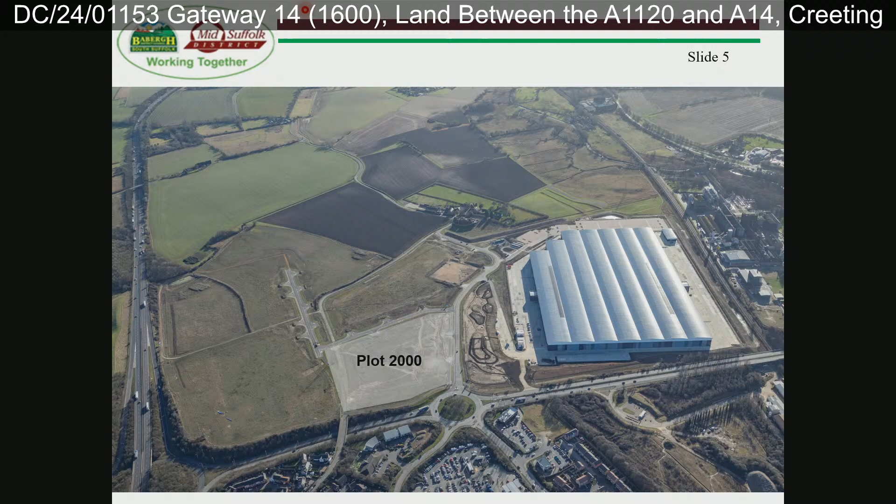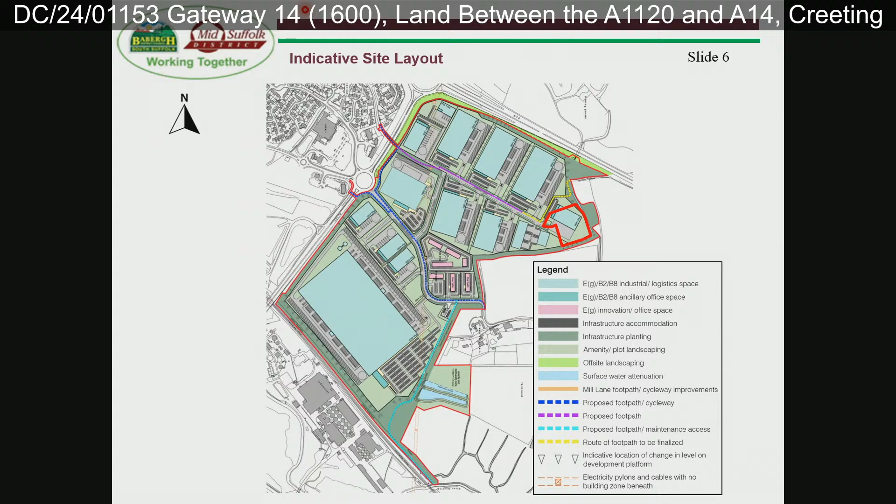This is the indicative site layout that was submitted at outline stage, and I've highlighted in red the plot that we've got the reserved matters for today. Moving on to site and constraints. This is the application site. It's in the easternmost parcel of land on the development, forming part of plot 1600. It measures approximately 1.54 hectares. You can see on that plan plot 4000, as that's now been built.

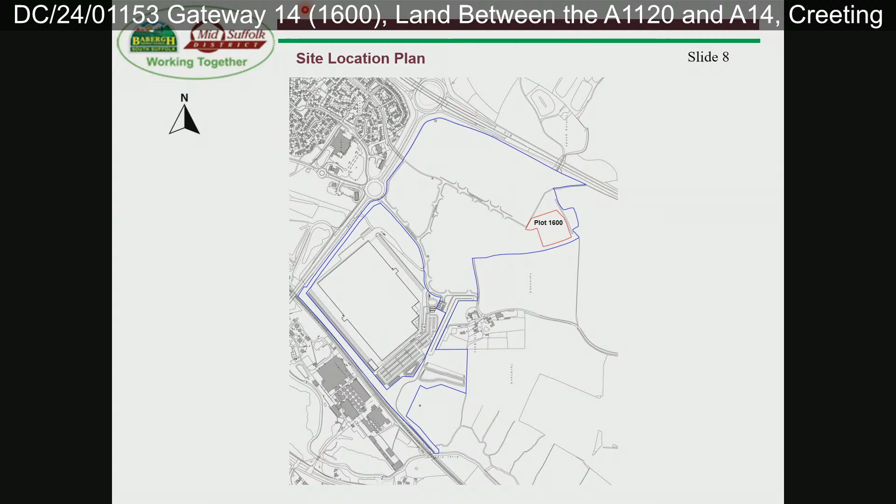And just for some context, we've got the A14 to the north, Cedars Park, Tesco's, Creeting St Peter, Clamp Farm Barns, and then the A1120.

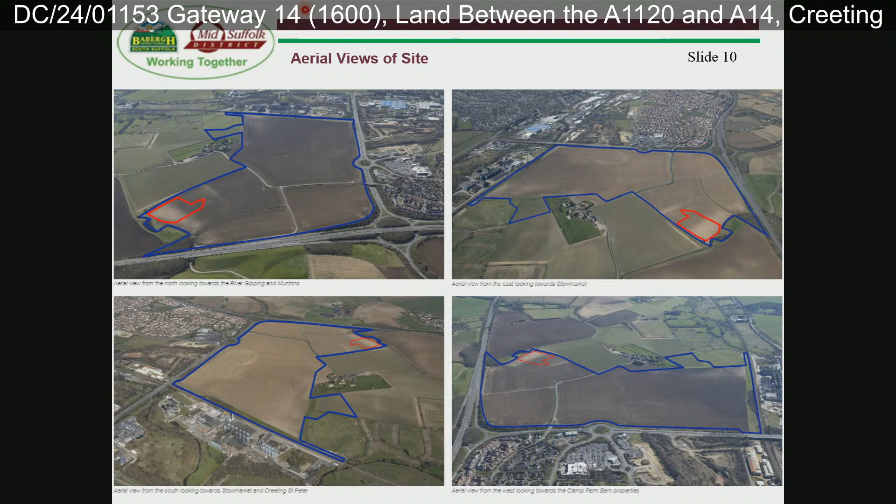And these are some aerials submitted with the application. Obviously they're not the most up-to-date as they don't show plot 4000 on there, but it gives some more context to the location. And then in terms of the constraints map, there aren't any constraints affecting the site.

Obviously it is outside the settlement boundary, but does have outline planning permission.

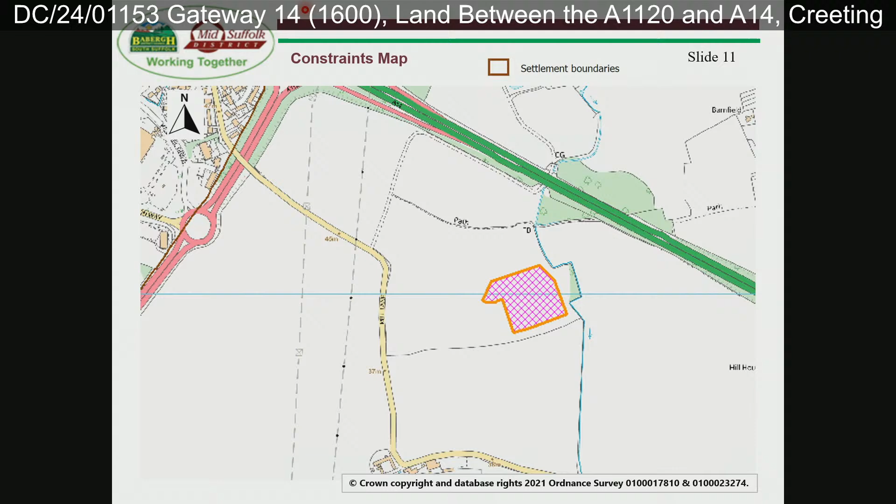And just wanted to briefly touch on the tenant, and I'm sure the agent is here today, they can give some more detail, but the plot and unit has been designed to meet the needs of Bauder, who are a manufacturing company that manufacture building construction materials, including green and blue roofs. They currently operate a facility in Ipswich, and it's my understanding that Bauder are repurposing and refurbishing their existing building in Ipswich, in which their distribution element would be relocated to Gateway 14. This expansion and job creation is envisaged across both locations at approximately 35 jobs.

And just to note that the proposal is for, as I said, B8 storage and distribution.

So moving on to the first reserve matter, layout. I've highlighted here the split between the B8 warehouse in red, the 2-storey office, which is attached to the north in green, and then a hazardous store, which is attached to the south. So the building would total 4,095 square metres, and 24% of the site would comprise soft landscaping.

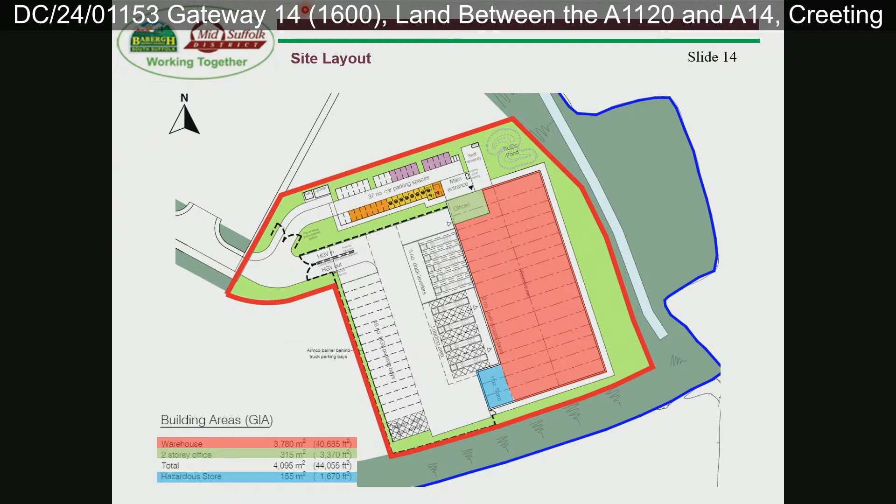And just looking at the comparison between the illustrative master plan submitted to outline and then the updated master plan we've got to the reserve matters, you'll note some changes. So the key ones are the reorientation of the building, the location of the service yard and car park, that this takes a smaller plot size than envisaged, and the loss and redistribution of on-plot landscaping.

So it's understood that these amendments have been driven by the site topography, which slopes downwards on an eastern trajectory in the corner. The revised orientation allows the site to work better with the topography, minimising the amount of ground remodelling required, meaning the building can sit at a lower ground level.

And just a recap of the site connectivity, you've got the Toucan crossing, which is installed and operational on the A1120, the stopping up of Mill Lane, which has occurred, and you've got a new footpath connection to Gipping Valley Way to the south.

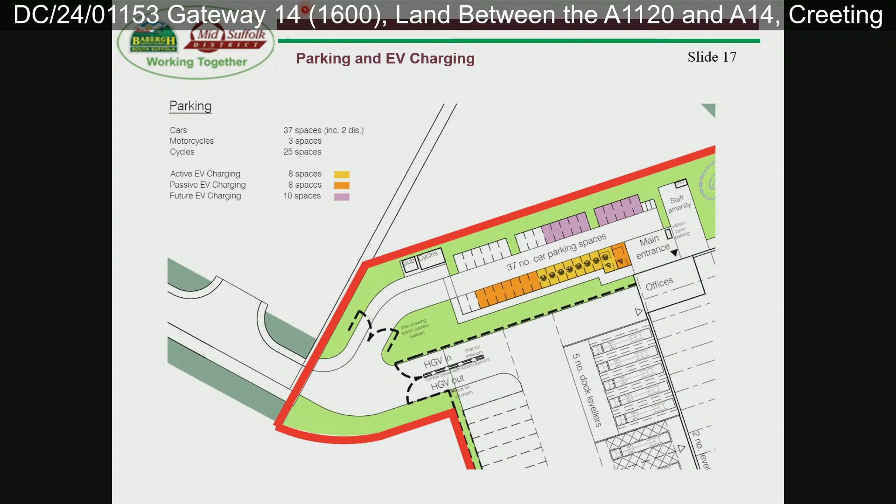And then moving on to parking and EV, so we've got 37 car parking spaces. We've got 8 active electric vehicle charging points, and then a further 18 which are to be provided above the standards with the infrastructure in place for future connectivity. All of the parking, EV and cycle storage is compliant with Suffolk parking guidance.

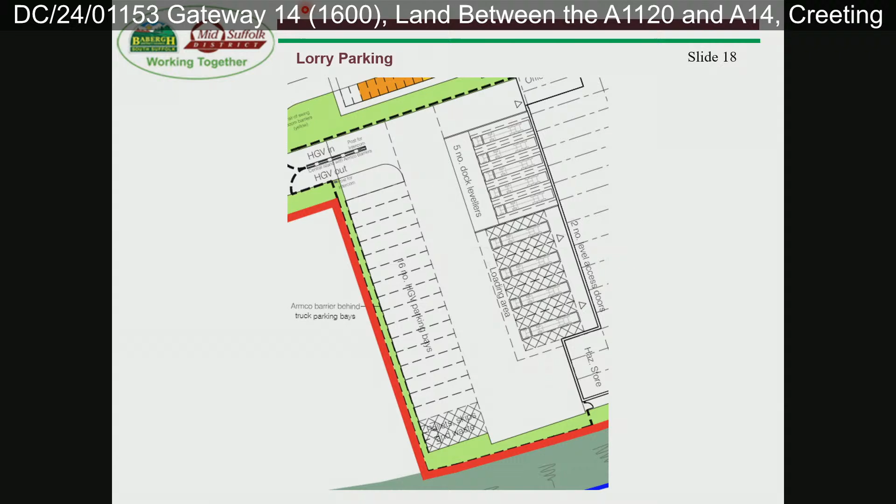And just moving to lorry parking, so you can see on this western boundary you've got 16 lorry parking spaces. As we've seen on other plots, it's possible that this area might also double up to be used for container and external storage. At the moment there isn't a proposal as such for this, but we're recommending a condition for a container and external storage management plan to contain details of the location and storage heights of this storage.

Just moving on to cycle storage, so you can see that the cycle store is located adjacent to the vehicular and pedestrian access.

Also, there is a proposal for shower and locker facilities within the office building, as we've seen on the other plots that have come forward, and specific details related to that are subject to condition. And there is also visitor parking adjacent to the entrance in the form of Sheffield stands.

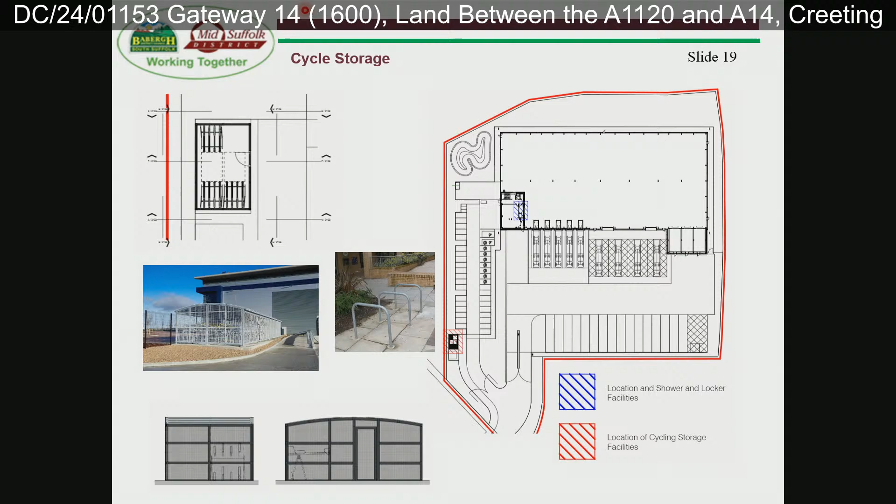Just in terms of access strategy, so you can see there's 2 accesses for this unit. Both come off Gosling Avenue. The northern access would be used for cars and also pedestrians and cycles, and then the southern access would be used for HGVs.

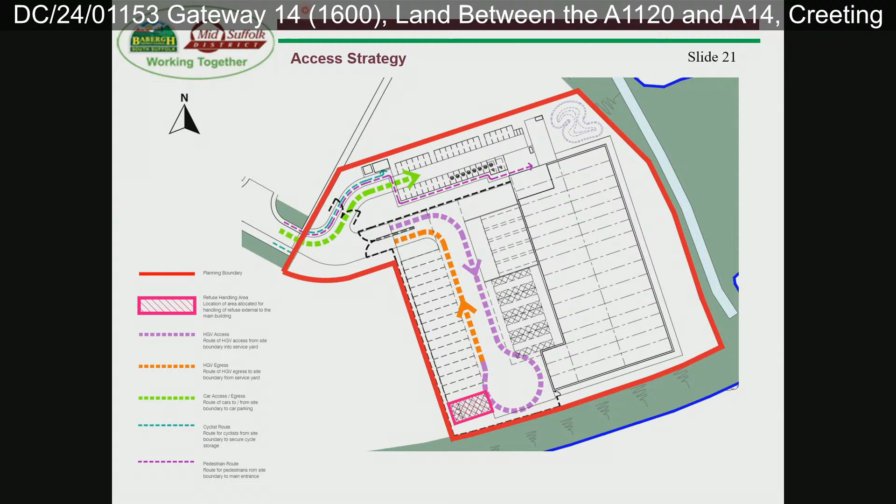And then just sort of for information, a non-material amendment application was submitted and approved to extend Gosling Avenue. You'll see from the photos that the public footpath has originally been installed in this location. I haven't actually mentioned it, but you can see along here, so this boundary, this is the public footpath, and you'll see that better in photos. But so, yeah, we've approved an extension to this roadway to connect the plot to Gosling Avenue.

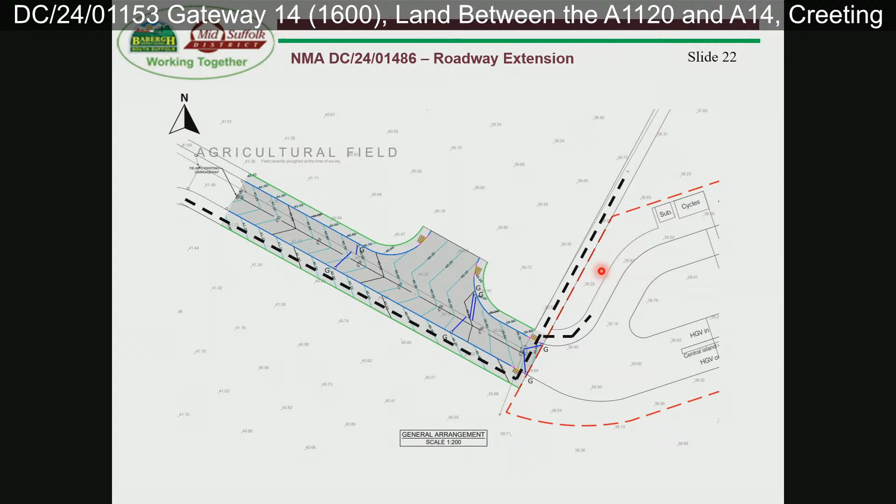The route of the footpath is unobstructed, so I'll just flash it up here. Essentially it will run to the south of this highway, and you can see a dropped curb crossing here, so cyclists and pedestrians can cross to then either take the footpath or enter the site.

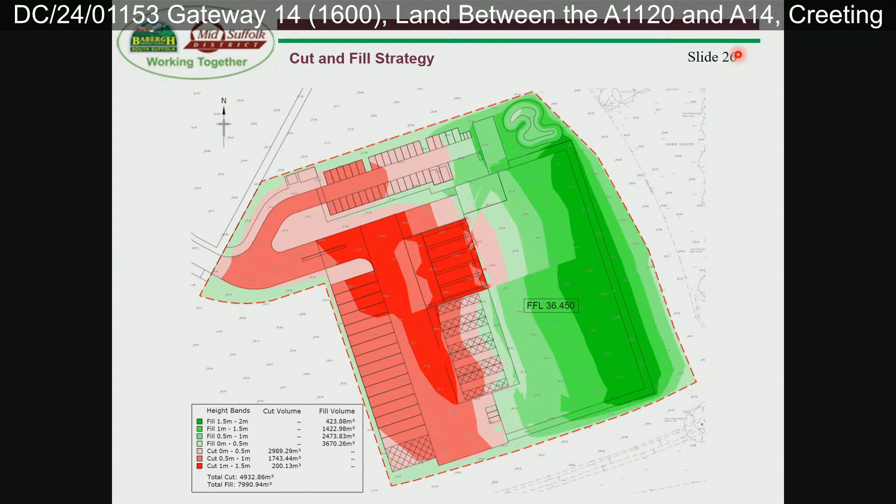And then just the cut and fill strategy that's been submitted with the application. You can see that soil from the west of the site will be used to fill the east of the site to create a level site. And there is an overall requirement for fill, and that will come from the on-site borrow pit. Because you might recall that on 4000 and 2000 there was excess cut, so that's what's being used on this plot.

And then just comparing levels between the outline and the reserved matters. I've just highlighted these by colour. You can see that the finished floor levels is within scope, or if not slightly lower than envisaged. Same with the maximum building height, the eaves height is also a lot lower than envisaged, as well as the maximum building height. And there's just a section at the bottom there. You can see the red dashed line at the top indicates how high the building could have been under the parameters set by the outline consent.

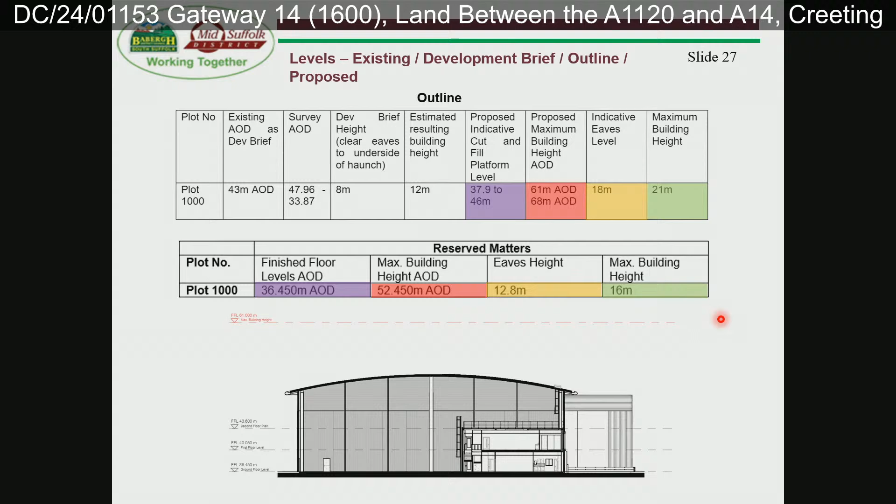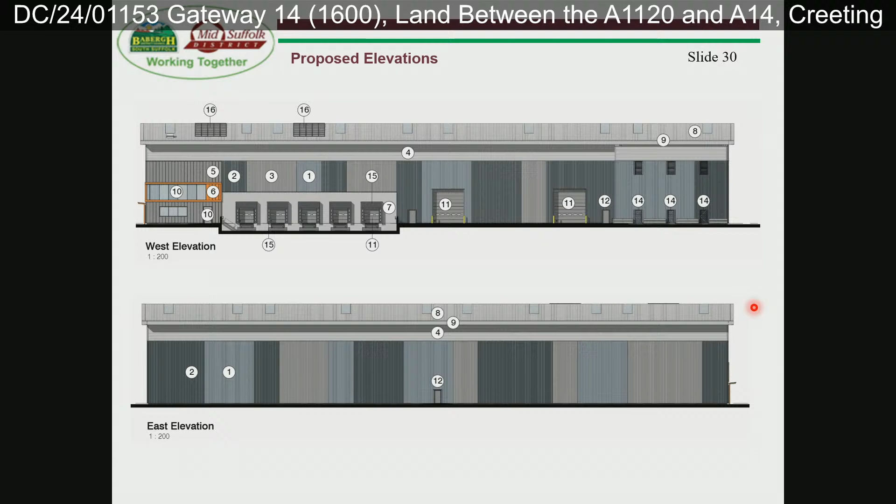And then moving on to appearance. So the proposed building would have a barrel vaulted roof to match the roof form that we've got on plots 2000 and 4000. The proposed materials include metal cladding, concrete panels, and steel and aluminium windows and doors. The cladding would be arranged in vertical bands of differing widths and complementary colours and tones. The proposed colour palette includes a variety of blues and greys to reflect the colours of the horizon, built form and sky.

And then just the entrance detail here. As on 2000 and 4000, we've got the lighter coloured top of the building, which, it's hoped, will reduce the perceived height of the building, and in combination with the vertical cladding, it will blend into the sky. And you can also see here the flat roof, which is the hazardous store.

And just moving on to some of the details. So this is the entrance detail. You can see there's a difference between the two cladding options. So here, sort of 1, 2, and 3, which you can see here, have the same type of cladding that we've approved on previous plots. And then to define the entrance, we've got vertical flat panels.

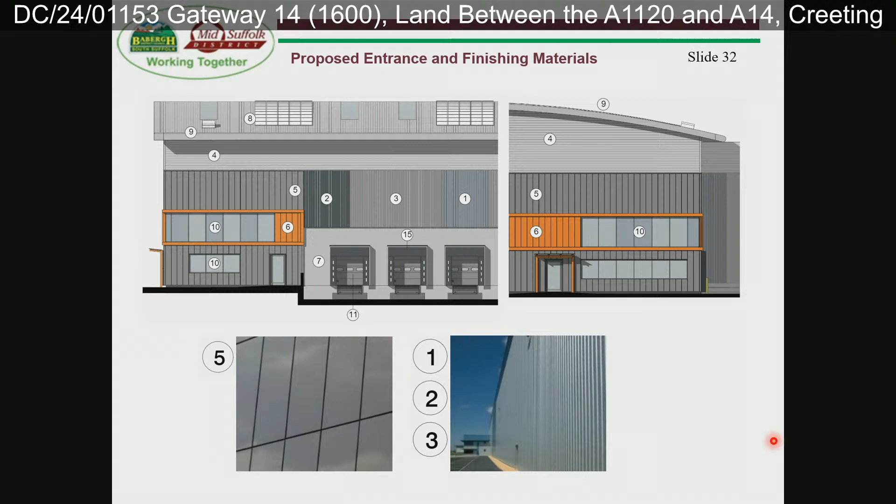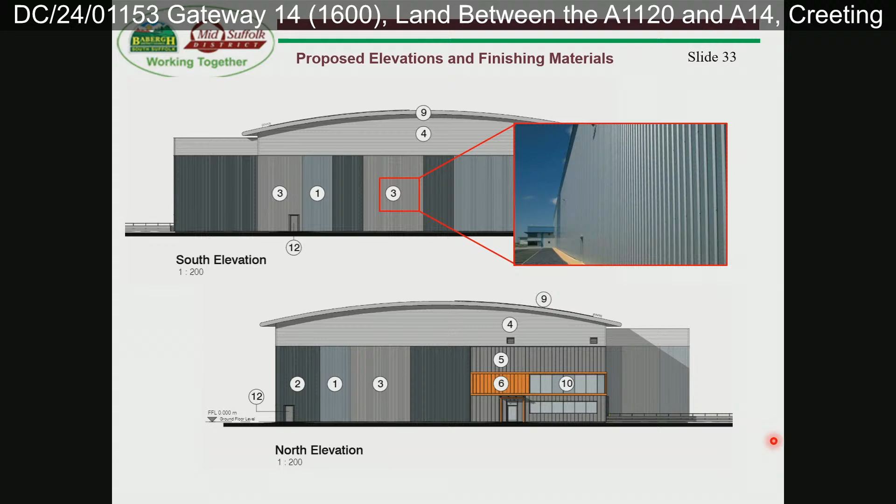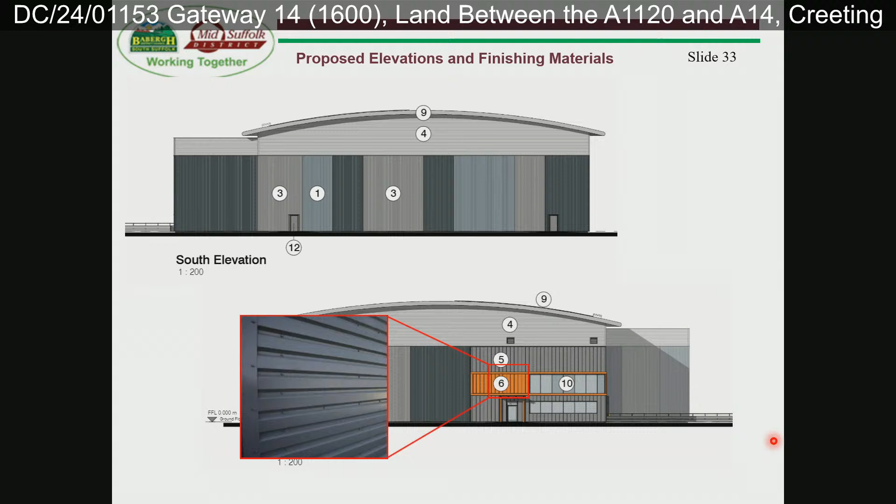And again, you have seen these before, but I just thought it'd be useful. So you've got the vertical trapezoidal cladding here, and then the cladding under the eaves, and then roof cladding. These are all the same as what we've got on 4000 and 2000. You've got the concrete panels around the loading bays and dock levelers.

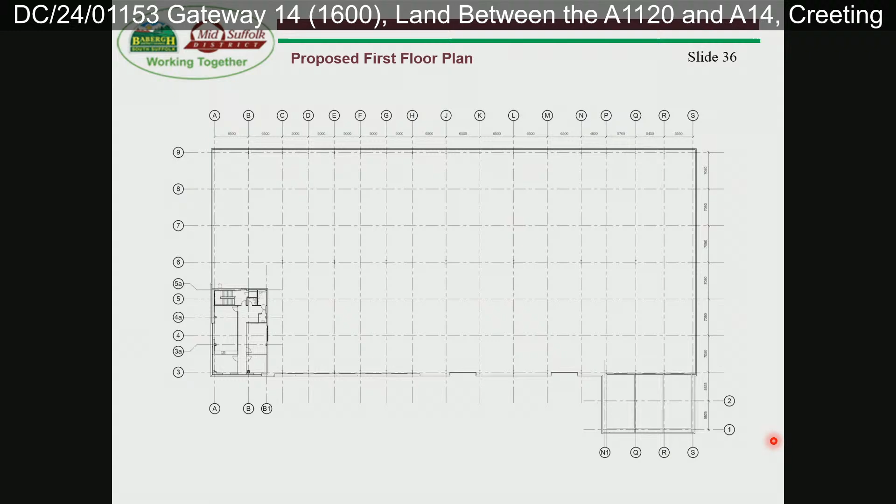And then just moving to the floor plan. So the proposed building has a depth of 45 metres and a length of 95 metres. So you can see here, the hazardous store and the office. And then moving on to the first floor, so the office does span, it's a 2-storey office. And then just in terms of the office detail, as you can see how it might be split up. You can also note here the shower and locker facilities for those that might choose active travel.

And then moving on to the roof plan, so you can see the barrel vaulted roof and some solar PV, and just to note that the whole extent of the roof has been designed to accommodate further PV installation should the infrastructure become available to do so.

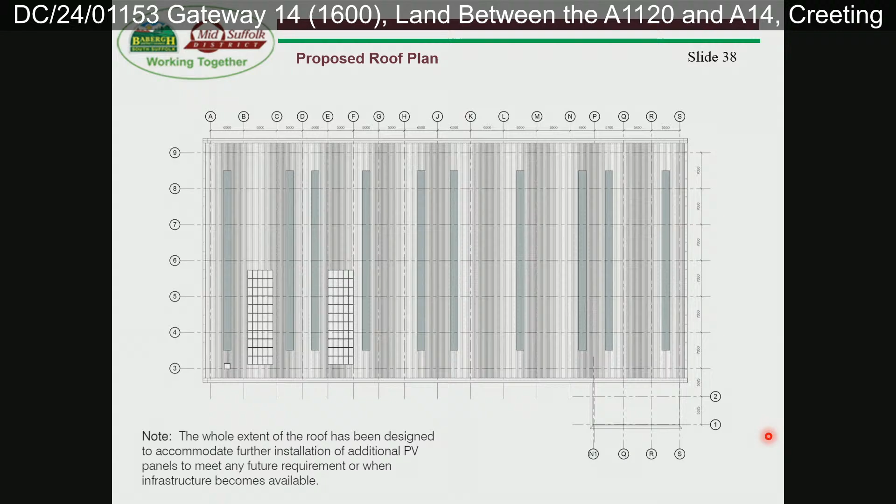And then moving on to colours, so I've included snippets of the RAL colours here just so you can see what they might look like. So the application was accompanied by an environmental colour analysis, and that illustrates that the views are made up of landscape, horizon, built form and sky, with the most significant portion of the visual setting of the building being sky. Just to note that all of the colours have been used on plot 4000 and 2000, with the exception of the orange, which is the tenant's corporate colour.

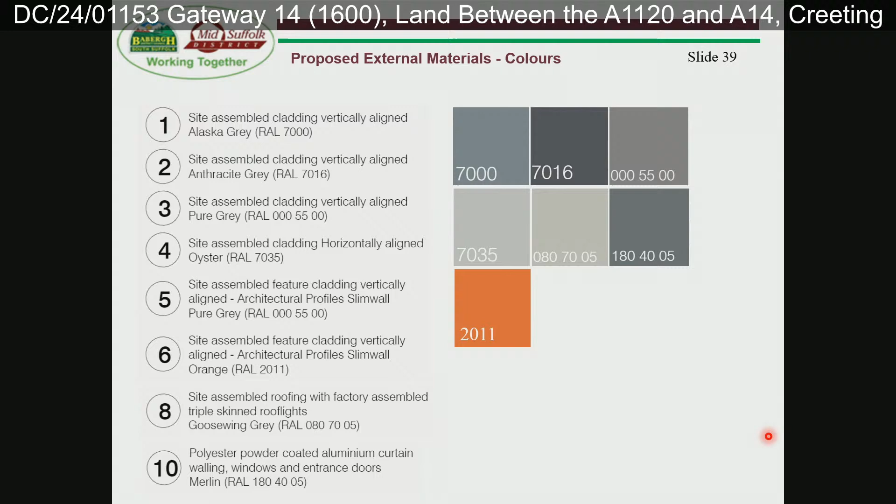And then just compliance with the design code, which is secured by condition. That's the same as what we've had on 4000 and 2000 in terms of that compliance.

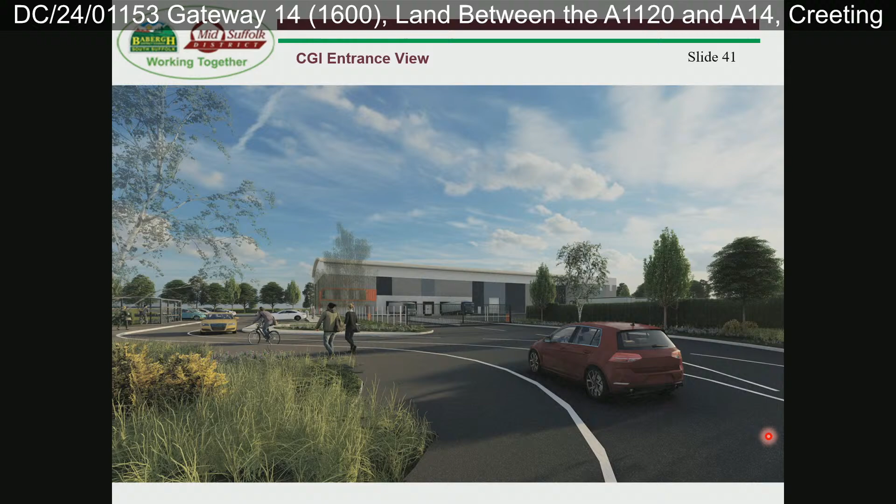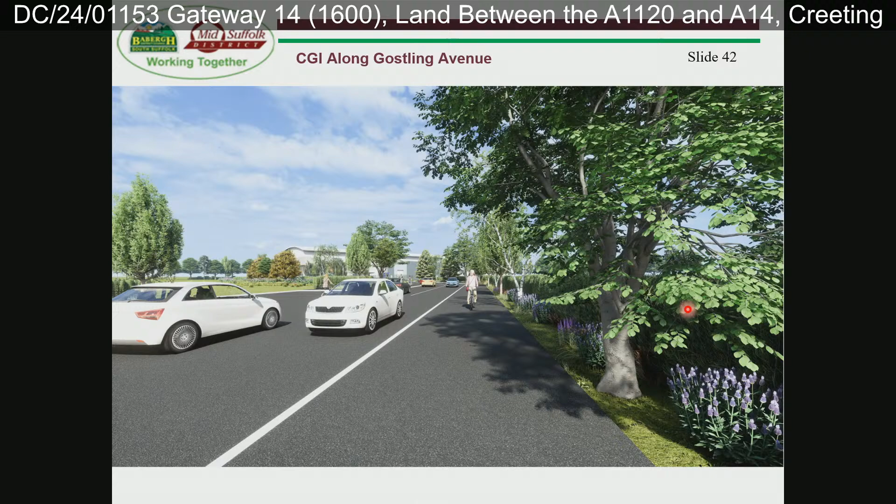Just to briefly touch on the energy and sustainability features, again very similar to what we've had on other units to date. So we've got a 40 kilowatt peak roof-mounted solar PV. Just to note, the on-site renewable energy technologies are predicted to achieve reductions in both regulated and unregulated on-site energy at 22.5%.

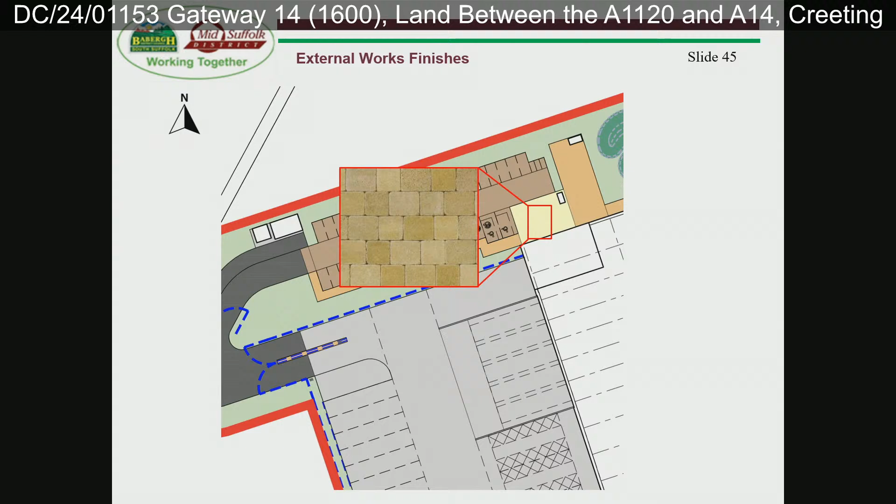In terms of external work finishes, these are again very similar to what we've got on previous plots, and I'll just go into some of the detail here. So we've got a 2.4 metre high weld mesh fence around the service yard, which I'll cover on a slide in a second. And then we've got brindle concrete block paviours. We've also got yellow concrete block paviours and grey, and then tarmac for the entrance.

Just in terms of those fences, so the blue, I'll just try and mark it out here. So the blue round here is to be a 2.4 metre high weld mesh fence, which you can see up here. There would also be an Armco barrier, post and rail, just at the back of the service yard here. But other than that, and the entrance gate here, there's no other proposal for boundary treatment.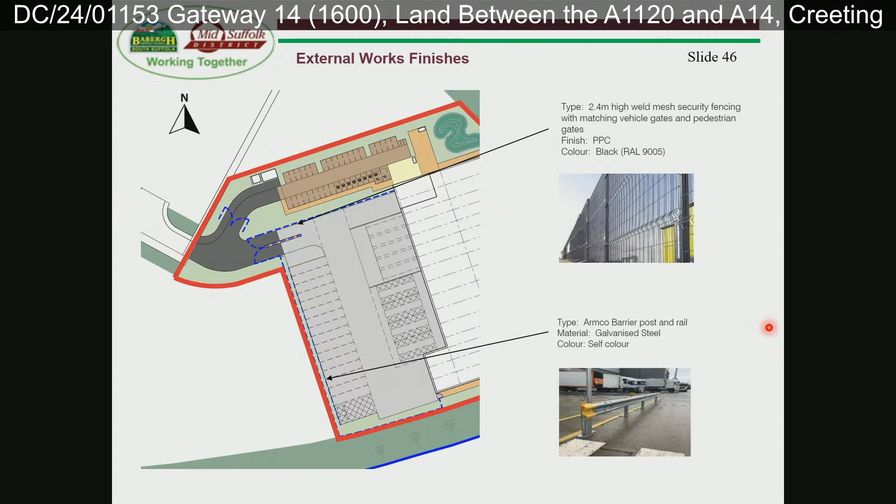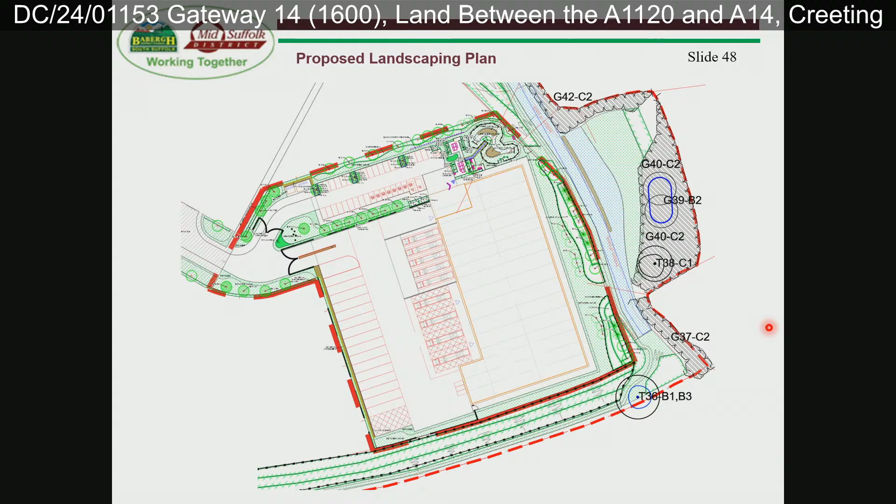Just moving on to landscaping. This is the proposed landscaping submitted with the application. The red dashed line around the plot, everything inside that is the on-plot landscaping subject to this application. They've also shown the structural landscaping on here to the south and eastern boundary. So the proposed landscaping strategy includes ornamental and native trees and shrubs, native hedges along the primary routes, a wildflower meadow, amongst other things. The proposed landscaping is predominantly around the building, car parking and service yard, and this will act to soften the visual impact of the building. I've included the key, but I appreciate it's quite small to read.

Just to note that biodiversity net gain is achieved at 0.61%, and this is being provided from the structural landscaping adjacent to the site to the east and southern boundaries. And as required by condition, 24% of the plot - it's in excess of 20% which is what the condition requires - they're providing 24% of this plot as soft landscaping.

Just a reminder of the structural landscaping. So you can see here that 2, and I think it says 5, wetland and open space link are adjacent to the site. From my site visits, I took some photos of this structural landscaping that has now been put in, albeit it's quite small currently, but obviously it will take some time to establish - that's in place.

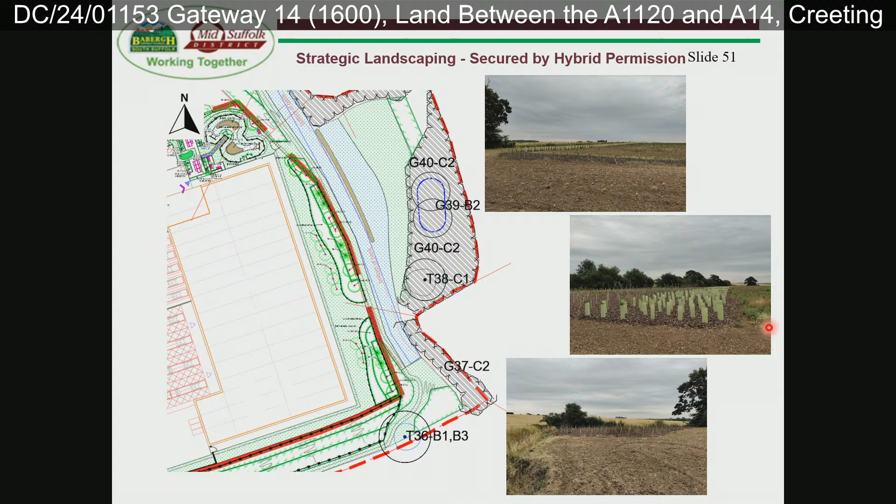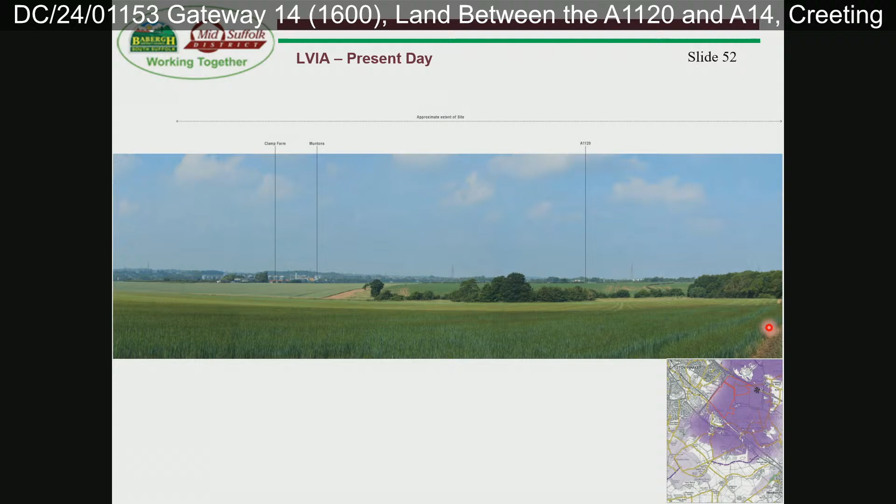Just some of the updated LVIA views. This is taken from towards Creeting St Peter and the A14 flyover. So this is present day, and then I've included the one for the 15-year visualisation, so you can make out the roof of 1600 here.

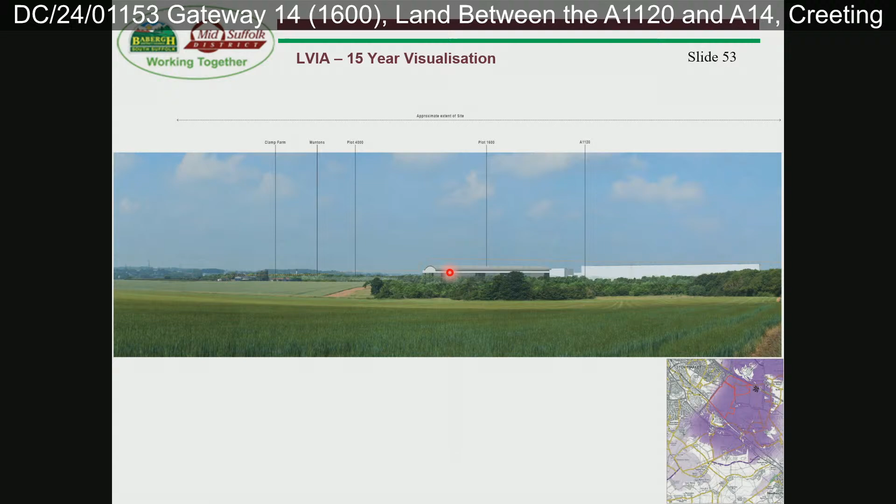And then looking - this one's taken to the south down towards the railway and the River Gipping, looking up towards Clamp Farm, Barnes. This isn't updated to include the range on it, but I believe the next slide you might be able to make out. So you can just about see the roof of plot 4000 here, and likewise you can just about see the roof of 1600 here.

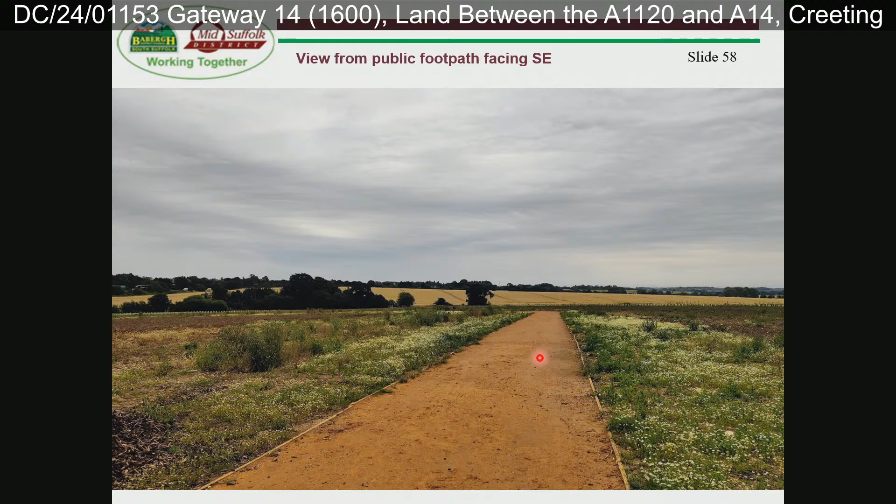Just briefly moving on to photos. This is the view from Gosling Avenue facing southeast down, so essentially the site is at the end, would be down here. You can see what I mean. This is the footpath that has been installed but will now be replaced with roadway to connect to the site, so it will essentially stop at the end. The footway will become the footway adjacent to the highway rather than this defined path.

So the recommendation is to approve reserved matters with conditions as set out in the report. Thank you. Do we have any questions from members?

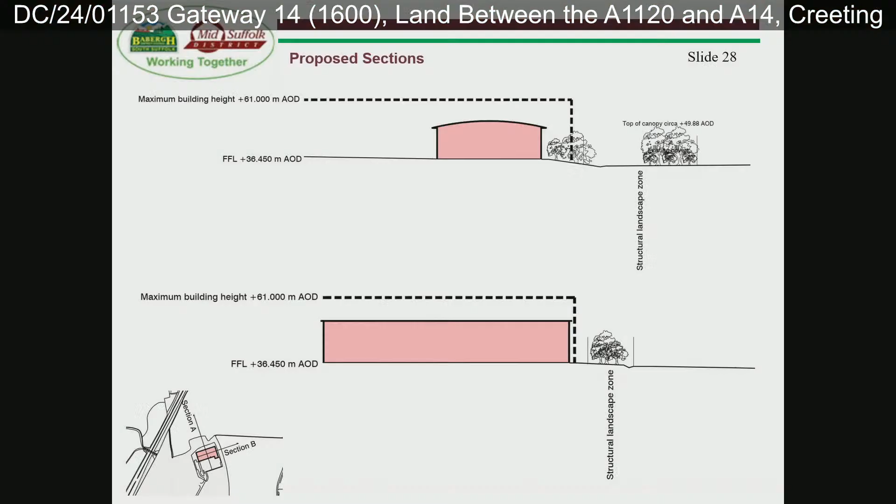It's not wanting to present, does it? Can you just blow up that image as it is now, just the top section? Zoom in a bit more, maybe. Yeah, thank you.

So I have taken some measurements. I believe the top of the building is 52.450 metres above ordnance datum, and the top of the tree canopy is anticipated to grow to a height of 49.88 metres AOD. So there is a difference of 2.5 metres, if my maths is right.

We had a look at the structural landscaping. It's the applicant's case that the structural landscaping was always intended to be relied upon for mitigating the visual impacts, and because of the levels on site, the structural landscaping on the eastern boundary, closest to Creeting St Peter, is at the top of a slope. Therefore any landscaping on the plot would be lower than the structural landscaping, and additional tree planting along that boundary wouldn't provide any additional visual screening. I just wanted to verify that their points have been taken into account, and that we've done as much as possible to mitigate the effects.

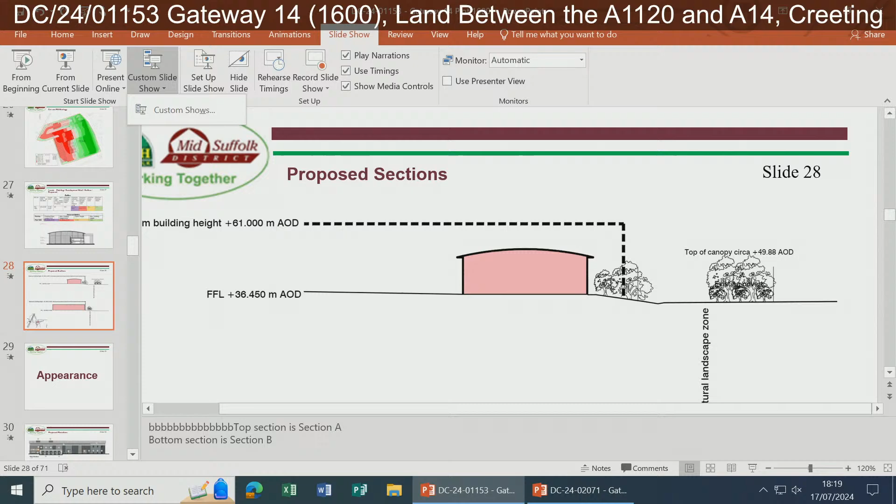You might have to remind me of your other question about lighting. It's a question of nighttime lighting, because villages to the east of Gateway 14 have in the past been remarkably dark at night. They are gradually getting lighter, and the lighting at night on Gateway 14 will lead to an increase in nighttime light and glare. I'm wondering whether that has been thought through, as dark skies are a significant well-being factor in people's quality of life.

I think for this plot specifically, it might be useful to find out from the applicant what the hours of operating might be, and if any nighttime operating is envisaged. And did you say the lighting condition was part of the outline? Yes, so that whatever will go through consultation with ecology to look at wildlife impacts, highways for users of the highway, and environmental health, looking at general residential amenity.

Did you want to come in, Phil? Perhaps this is a question to put to the applicant. Are there any further questions? Can I just ask, just to clarify about the fencing - there's only fencing around the service yard. There is no fencing whatsoever between the car parking area and the northern boundary of the site. There's just going to be a gate into the car park surrounded by bushes. Is that right? Yes, that is my understanding.

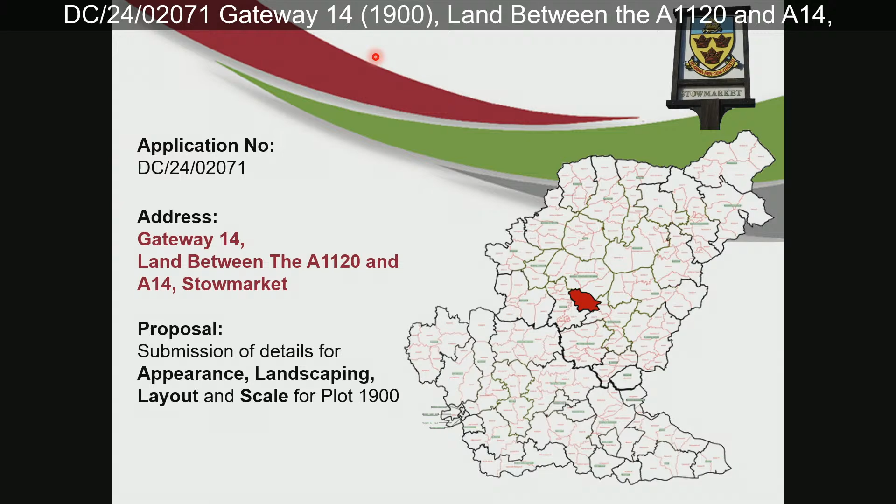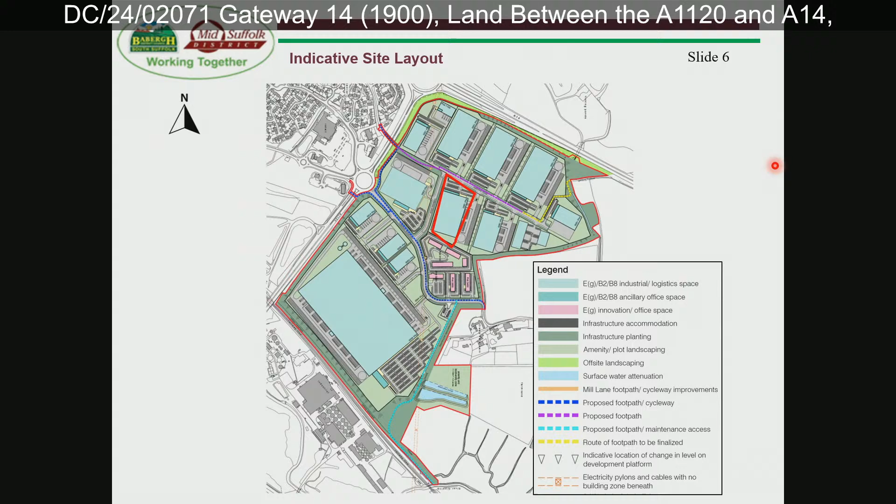This is obviously slightly different. So you've got plot 2000, plot 1600 down in the eastern corner, and then 1900 is on the opposite side of Starfinder Way. Looking again at the illustrative master plan submitted at outline, this plot is located centrally within the Gateway 14 development, to the north of plot 3000 and within 1000.

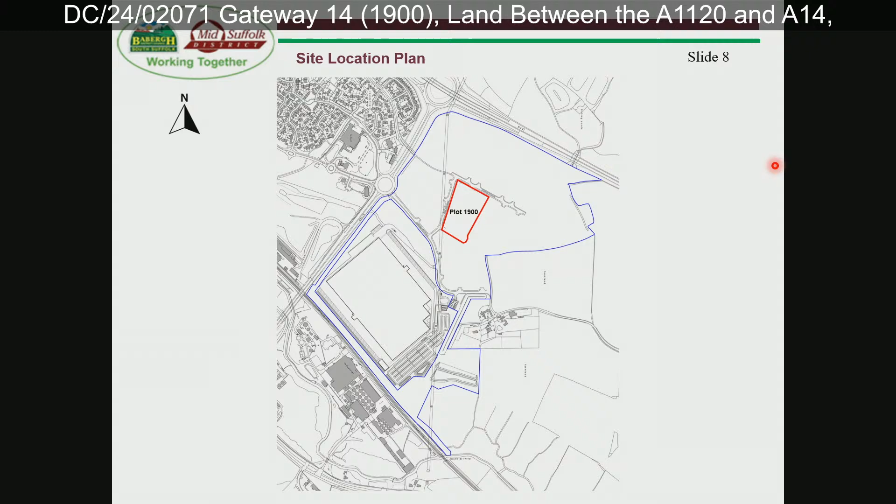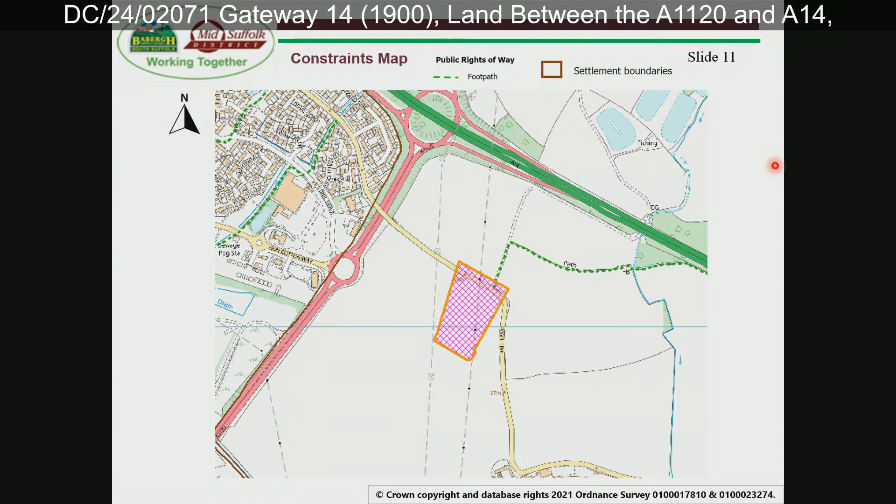Moving on to site and constraints. Again, the site location plan, and the aerial - I'll quickly flick through this as I think we know where it is. Again, the aerials submitted with the application, and again the constraints map. One thing to note here is the location of that footpath isn't correct and doesn't show the diversion route.

Just briefly, I'd note that we have the applicant, and we have Assan Panel, the tenant, with us today, so I'm sure they'll give an introduction about their company. This plot and unit has also been designed to meet their needs - they manufacture sandwich panel construction materials in various design profiles, and they would manufacture on the site.

So the proposal is for a mixed B2 and B8 use. The unit would generate approximately 90 full-time equivalent jobs. Also important to note that Assan Panel have been granted Freeport status as part of Freeport East.

Quickly moving on to layout, I've again divided the building up for clarity. You can see red is the warehouse, so the B8 use, and blue is B2, the manufacturing side. There's also the office component, the ancillary element here. The building would measure 8,042 square metres. The total on-plot landscaping comes in at 22.3%.

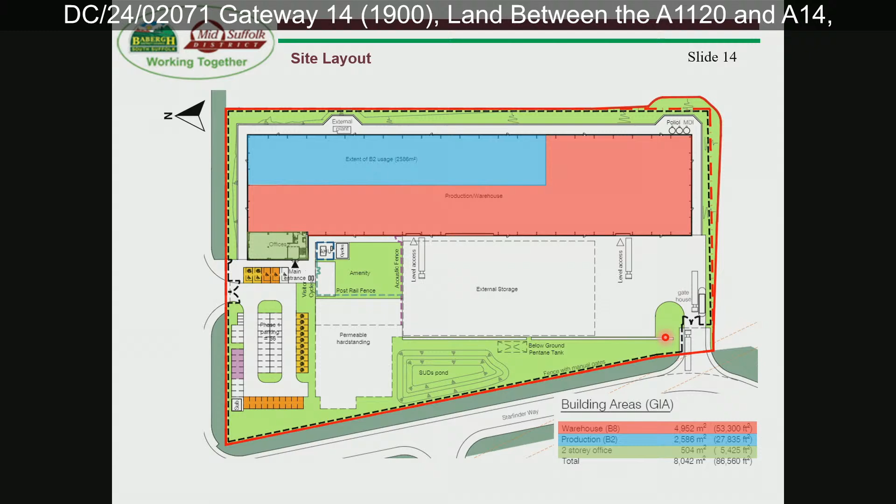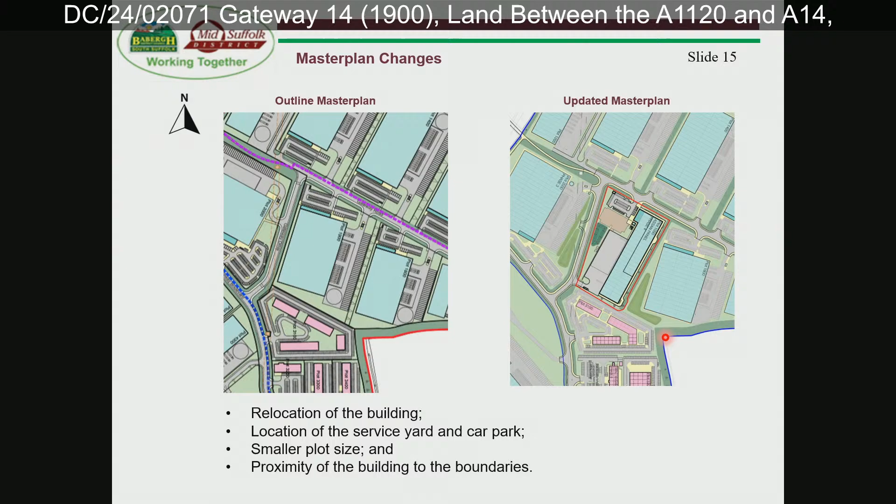Comparing the outline master plan and the updated master plan, you can see the building has been relocated up to the eastern boundary, requiring relocation of the service yard, with the car park still towards the north. It's also taking up a slightly smaller plot size. This impacts the building's proximity to the site boundaries, and these amendments are driven by the occupier's operational needs, primarily requiring the building to be long and narrow to accommodate their lengthy production line.

I'll quickly go over this slide again, which you saw last time, and then move on to parking and electric vehicle charging.

This is the proposal that would come forward should the application get approved, providing 56 car parking spaces and 48 cycle spaces, with 12 EV charging units and a further 18 spaces to be provided with the infrastructure. The permeable hard standing to the right has been put in to future-proof the site for further car parking should the occupier change and more parking be required.

In terms of why parking has been calculated at 56 spaces, you'll note in the report that this doesn't comply with the parking guidance. Assan Panel have identified that the site will operate a three-shift 24-hour day basis, with peak shift changeover requiring less than 40 car parking spaces. So this actually exceeds their requirement.

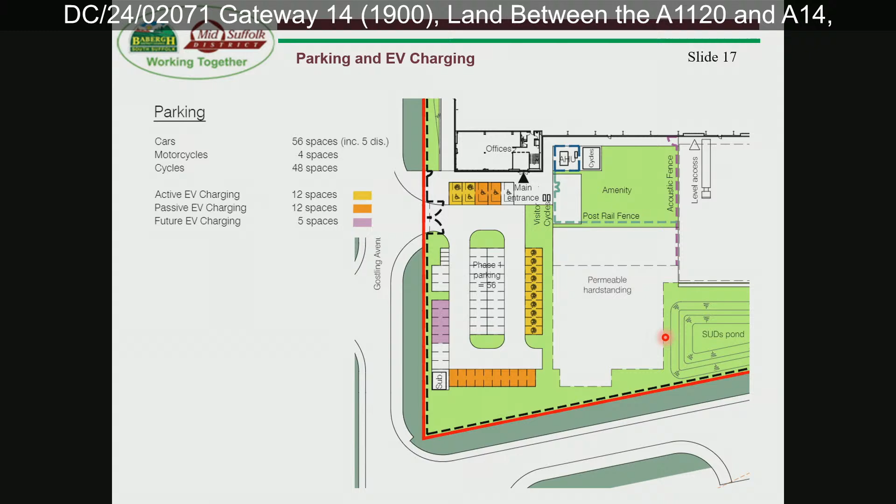We've touched on the potential to use the Rangers shuttle bus and also the Gateway 14 shuttle bus. To show the phases: phase 1 would come forward essentially today, and phase 2 is the option for further car parking, providing an additional 34 spaces on that hard standing.

To justify the reduction below the car parking standards, they've looked at the TRICS database, which looks at trips from similar developments, and identified 4 sites with comparable ground floor areas. Two of the sites have comparable maximum parking accumulation, meaning the number of vehicles parked at any given time, and two have lesser parking.

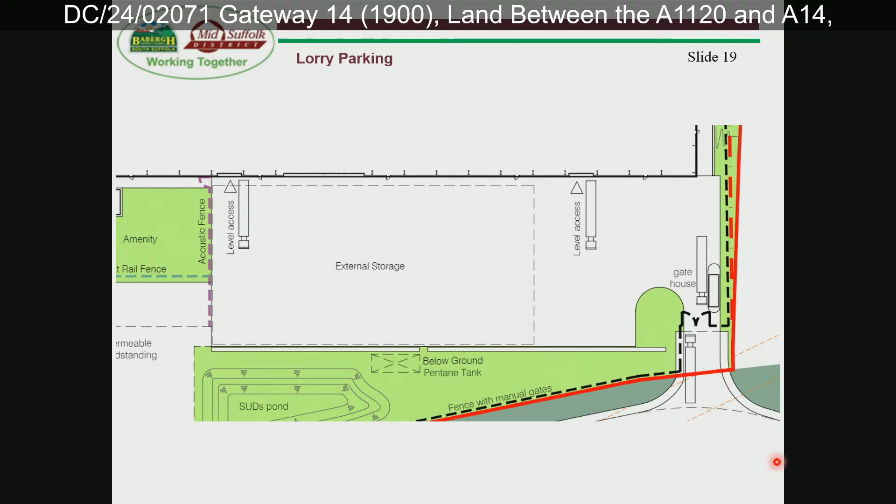Moving on to lorry parking, there isn't any demarcated lorry parking, although the service yard could provide that. That's because there's no requirement for Assan Panel to have any HGV parking on site, as it's not how they operate—the HGVs would essentially arrive, load the product on, and then leave to make the delivery. I'll come back to the storage areas further in the presentation.

On cycle storage, you've got the employee cycle stores here. You'll note there isn't currently a blue area shown for showers and lockers, mainly because it will depend on the internal fit-out that Assan decide. Those details are required to be submitted under condition 53 of the outline, so we'll be getting them, but at present we don't know where they'll be sited within the office space. We've also got Sheffield stands for visitor parking at the entrance of the building.

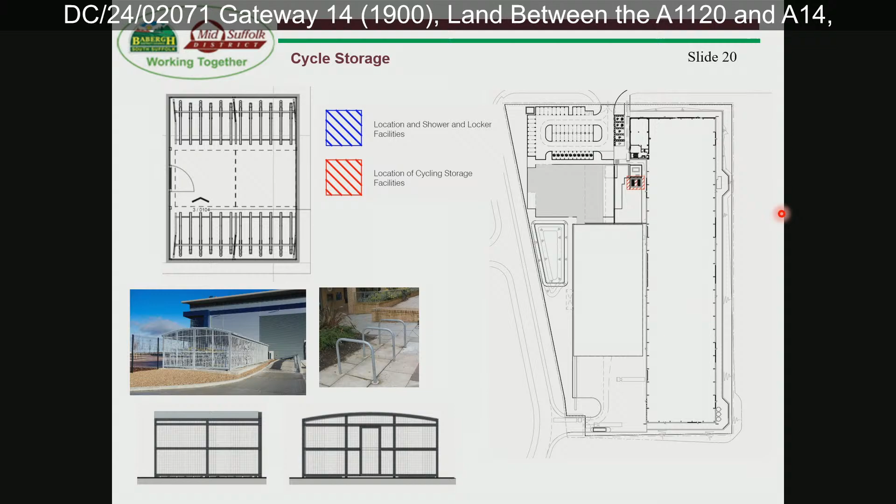Moving on to the amenity space, it would be finished with turf, wildflower, tree, shrub and hedge planting, surrounded by various types of fencing, which I'll go on to later. The area would also have some picnic benches for employees to use.

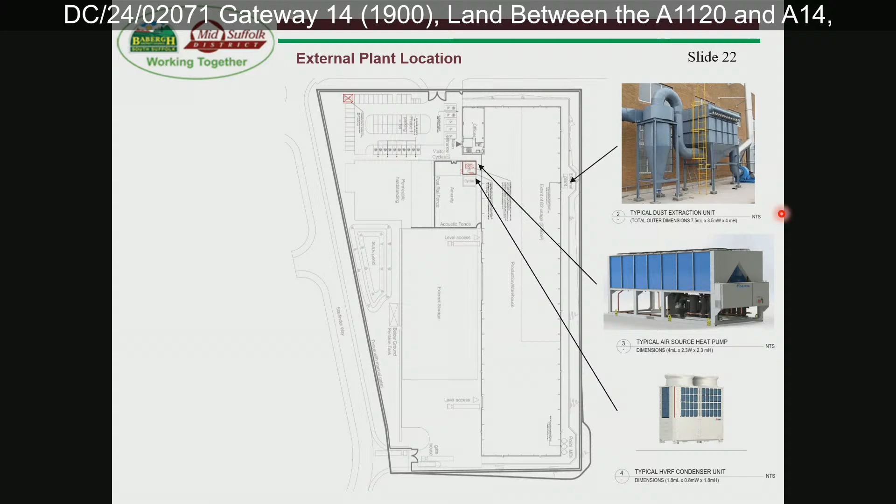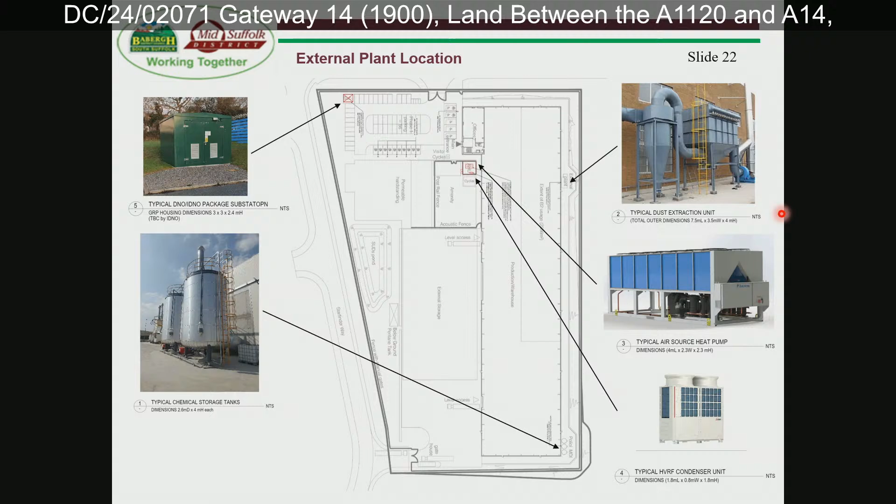I just want to briefly cover external plant. There's a dust extraction system at the back of the building, an air source heat pump adjacent to the amenity area and cycle store at the entrance of the building, and a condenser unit also within that area. We've got chemical storage tanks at the rear of the building, a DNO substation on the edge of the car park, and also the electric vehicle units there.

On the access strategy, there are 2 access points for this plot: one from Starfinder Way at the west of the site, which would be purely for HGVs, and one to the north along Gosling Avenue, which would be for cars, pedestrians and cycles. You can see the demarcated dropped curbs on this plan, where people could cross here and also up here.

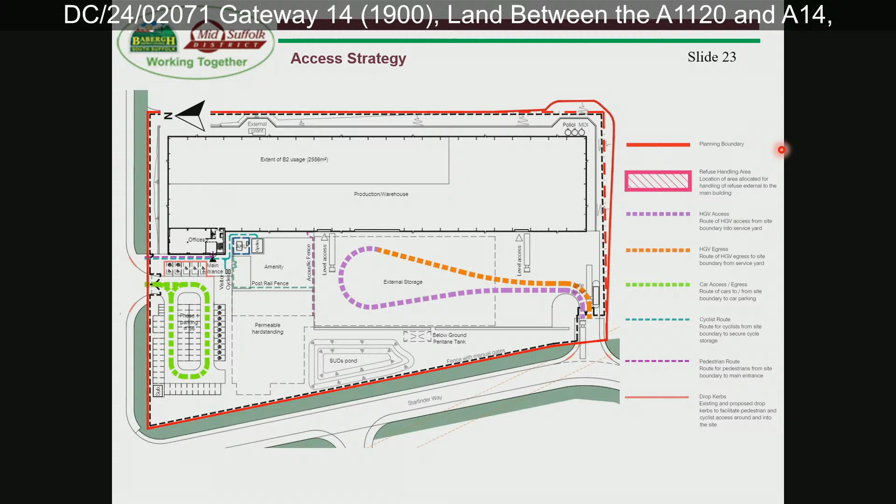Moving on to scale, again this is the existing site plan and the parameters plan secured by the hybrid permission. As we noted previously, condition 11 secures the building height - sorry, that should say plot 1000, not plot 2000 - also at 21 metres.

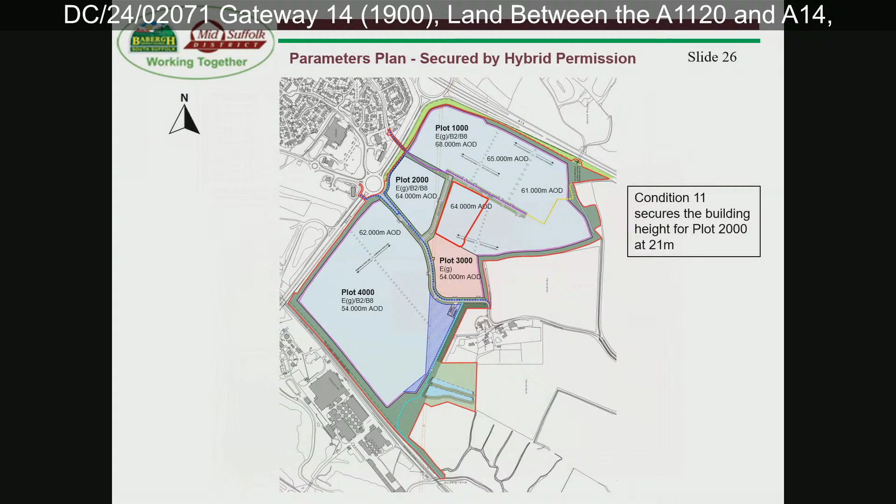In terms of the cut and fill strategy, soil from the north and northwest of the site will be used to fill the south of the site to create a level site. We're in a similar situation to plot 1600, where there is a requirement for fill, and that will be taken from the on-site borrow pit.

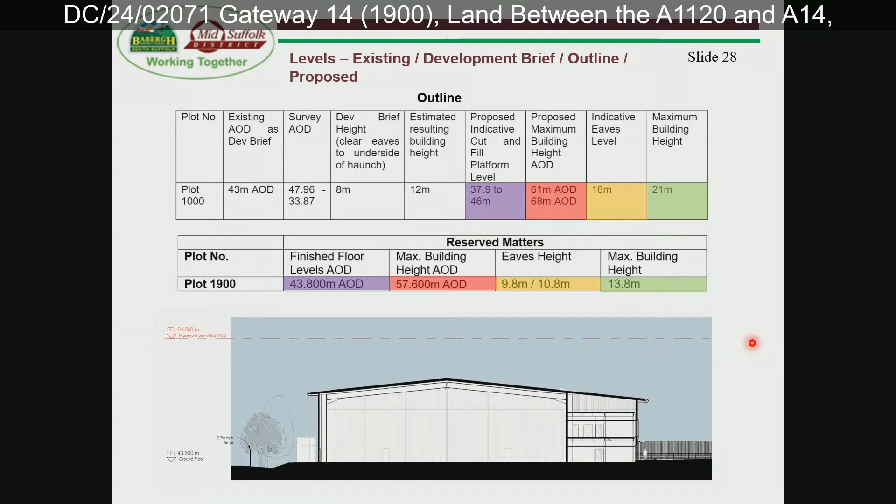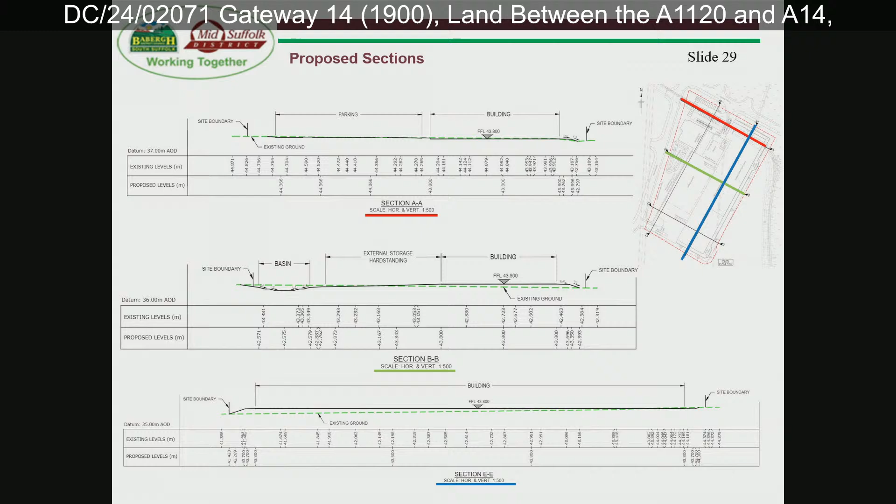Moving on to appearance - you can see that this building has a pitched roof, and it's the first plot on the development to deviate from the barrel vaulted roof form.

As we've said, there is value in following design consistency, but the pitched roof form has been chosen for this building to achieve a lower profile and to accommodate the occupier's own PV-ready roofing product. In our view, the low pitch will achieve the same general effect as the curved roof in helping to soften long-distance views of the short elevation.

The proposed materials also include metal cladding and steel and aluminium windows and doors, again arranged in vertical bands with a similar colour palette.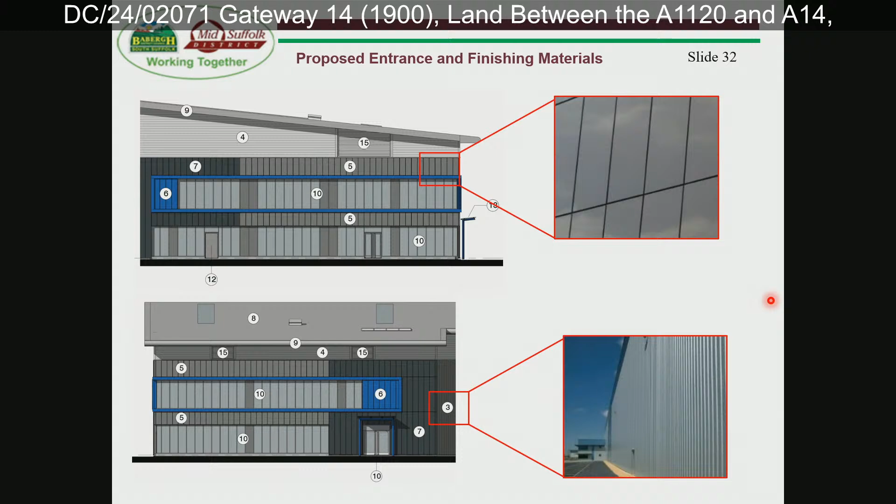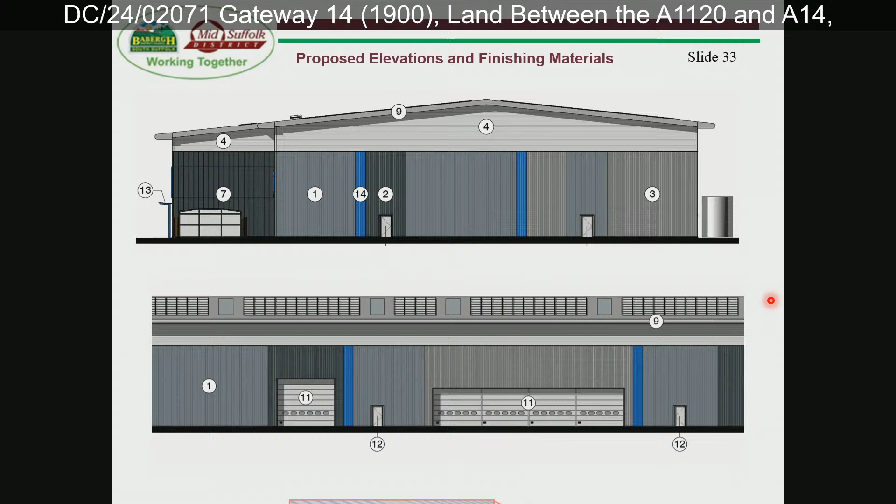Looking at the window detail, it's fairly similar to what we saw on plot 1600 in terms of the difference between the vertical flat panels around the entrance and the trapezoidal profile panels around the rest of the building. I'll run through these quickly, but again it's the same materials we've seen on the previous plots.

Moving to external storage - Assan Panel require an area of external storage for finished product prior to loading onto HGVs for distribution. The materials are typically stored on pallets and wrapped in film, and they've provided some images from other sites of what this external storage might look like.

This elevation below shows in green the extent of external storage on the plot, though I don't believe it includes storage that would take place on the permeable hard standing - it's purely this rectangle on the service yard. They've noted that on average the stock height is around 3 metres.

We are recommending, as per their request, that this area is restricted to a height of 4 metres, and the permeable hard standing - which has been designed to be multifunctional for future car parking if required - is at 2.5 metres high, given its proximity to the highway. We're recommending the same external storage and container management plan condition.

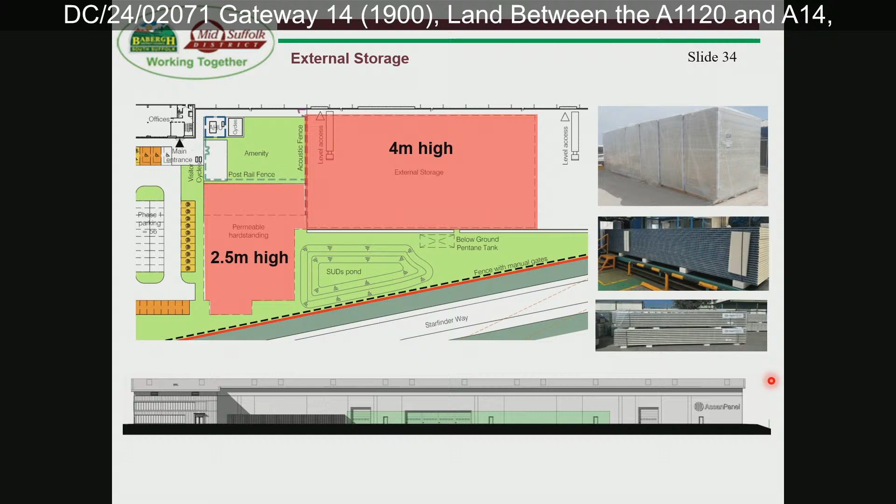Also looking at the underground pentane tank in more detail - I've highlighted it in black there to show its location below the service yard, and we've got some images provided by the applicant of this.

The Assan Panel production process requires the use of pentane. I'm sure they can go into more detail, but it's used as a blowing agent and helps the substance foam up and deliver its high thermal resistance value. It is both flammable and explosive, and therefore must be stored correctly.

The proposal is to bury it in a concrete pit encased in sand and topped with a concrete lid, meaning only the pump, pipeline and access panel will be visible, as you can see in the example image here. The installation of the tank and storage of pentane on site will be in full accordance with the standards.

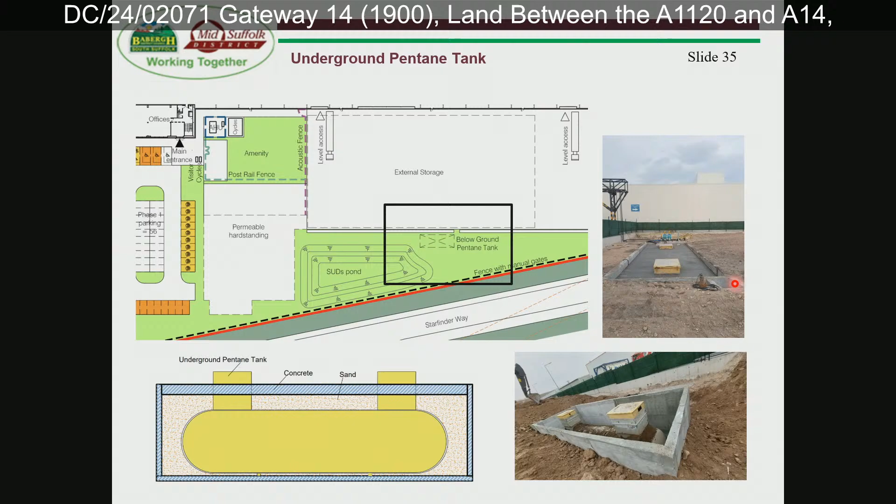Moving on to the office - as I noted previously, the showers and lockers aren't shown here, but they are required to be provided under condition 53.

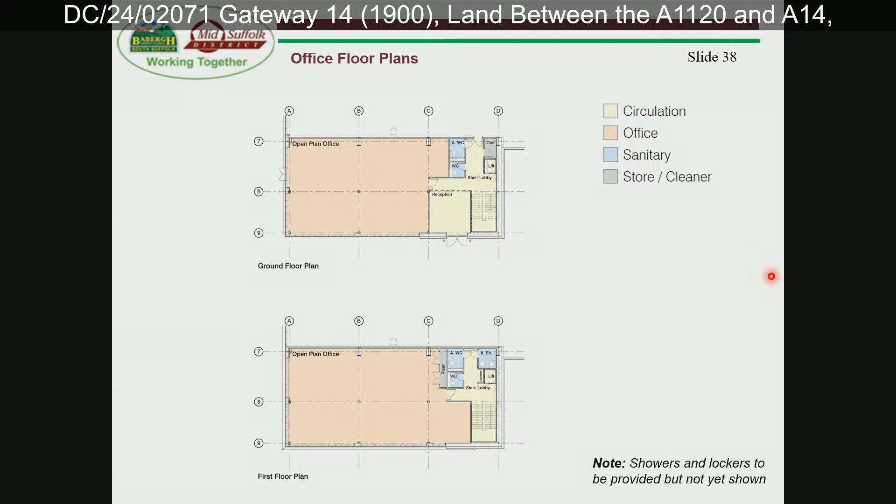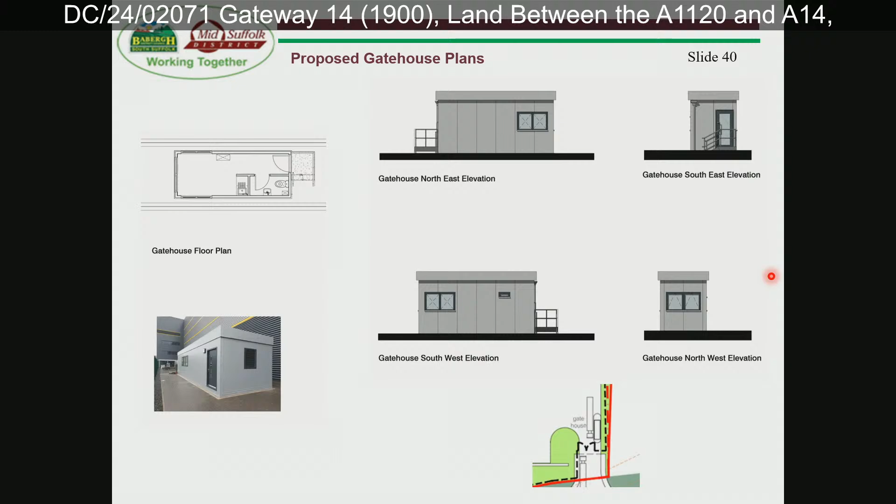The proposal would also include a small gatehouse at the HGV entrance of the building, following similar form and scale to what we've seen on 2000 and 4000. On the colours, these were informed by an environmental colour analysis, and all these colours have been used on previous plots, with the exception of the blue, which is Assan's corporate colour.

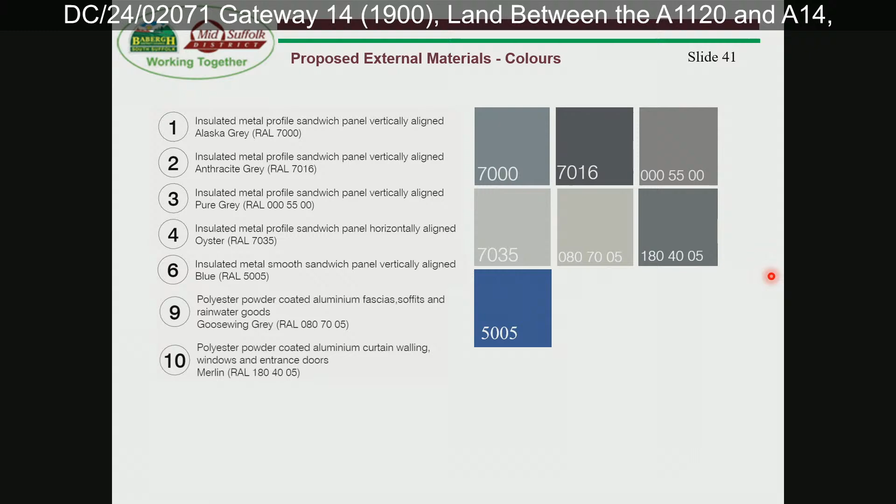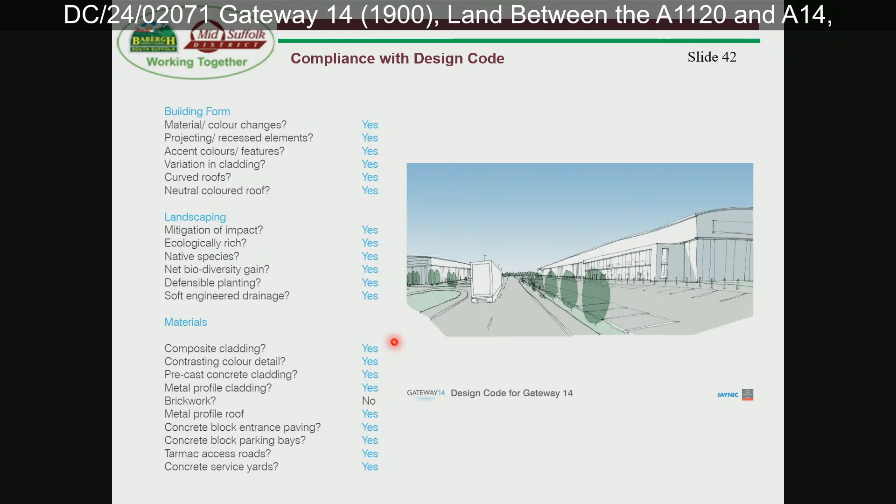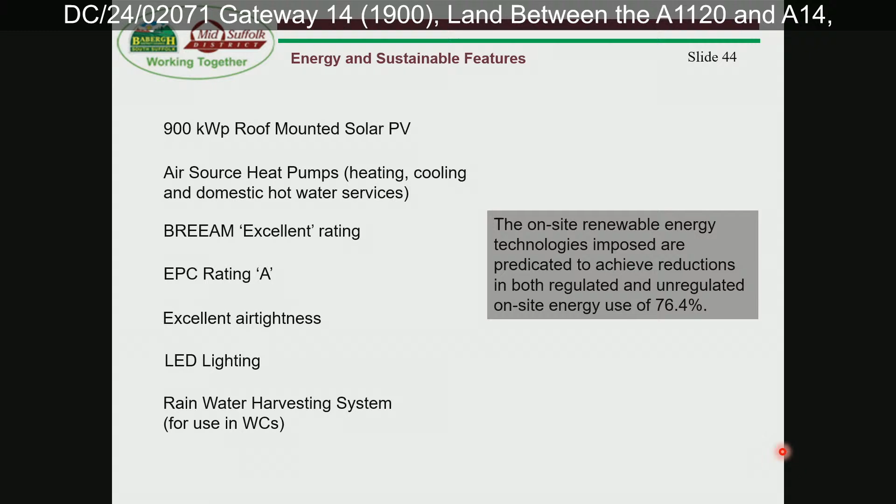Just to quickly cover the energy and sustainability features, these are largely what we've seen on previous plots, with a PV array of 900 kilowatt peak, predicted to achieve reductions in on-site energy use by 76.4%.

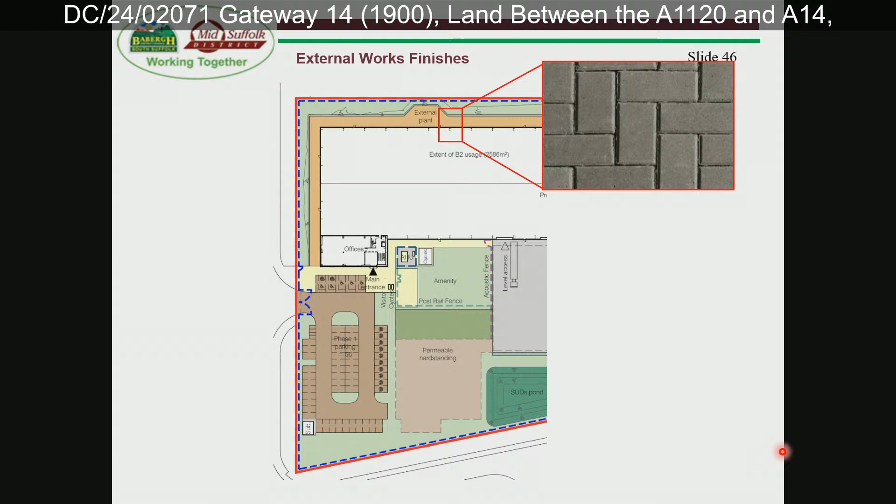External works finishes are very similar again in terms of materials, so you've got the brindle, yellow and grey concrete block paviours. They're proposing a grey gravel to the permeable hard standing area, and the strip between the hard standing and the amenity area as grasscrete.

Just to go over the fencing, there are a few different proposals here. Part of the requirement of the Freeport status is that the site is secured by a 2.7 metre high weld mesh fence, which is proposed to go all the way around the application site. The proposal also includes a 3 metre high timber acoustic fence to run along the edge of the service yard adjoining the amenity area.

This is purely for the benefit of the employees using the amenity area, to block out some of the noise largely from the use of the service yard. We've also got a 2 metre high timber hit and miss fence around the air source heat pump in the centre here, mainly for visual screening. And lastly, a 1.2 metre high timber post and rail fence around the south and west of the amenity area, just to demarcate that area from the rest of the site.

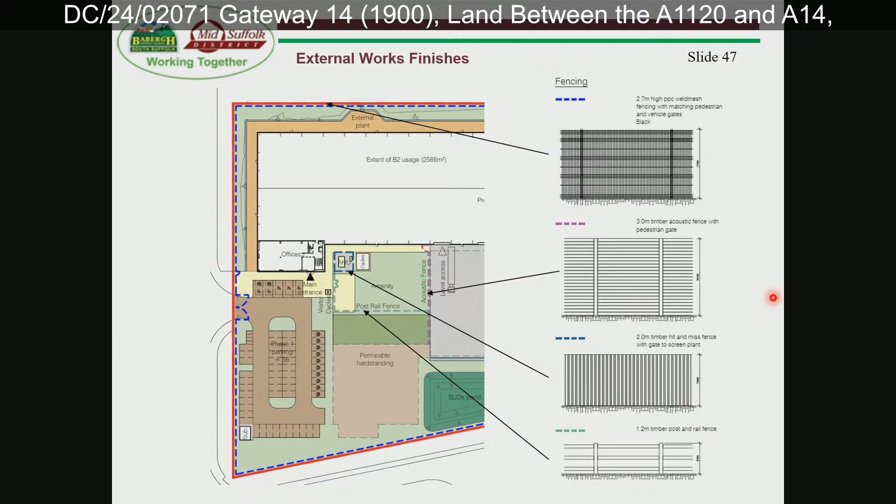Moving on to landscaping, the proposed landscaping strategy is similar to what we've had on previous plots. It's predominantly around the boundary of the building, car parking and service yard, and that will act to soften the visual impact of the building. The off-site BNG is provided using the northern and western structural landscaping, and that comes in at just over 10%.

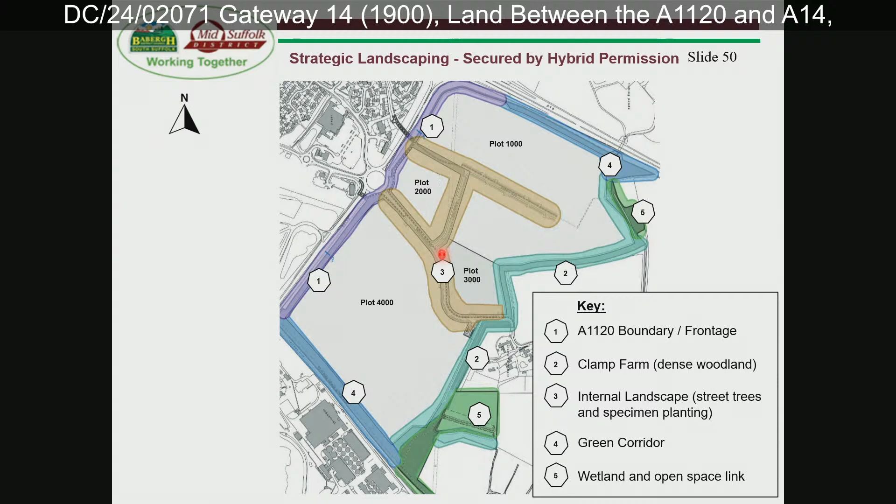Also, in accordance with the 20% condition, they're providing 22.3% of the plot as soft landscaping. The structural landscaping shown here, number 3, is the internal landscaping comprising street trees and specimen planting. This one is included mainly for context, because you can see the structural landscaping around the boundaries of the highway.

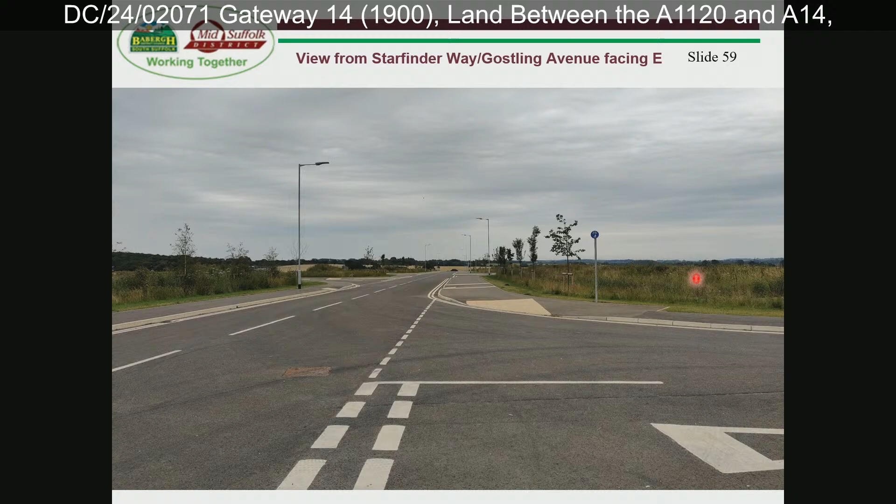This time we're at the other end of Starfinder Way facing south, and you can see the range building on plot 4000 on the horizon there. We're at the intersection of Starfinder Way and Gostling Avenue facing east, so the corner of the building would essentially sit behind the car parking on this corner. Here's another view of the corner, showing the structural landscaping that's started to mature along the boundary.

So again, the application is recommended for approval, subject to conditions.

Thank you. Do we have any questions from members on this application?